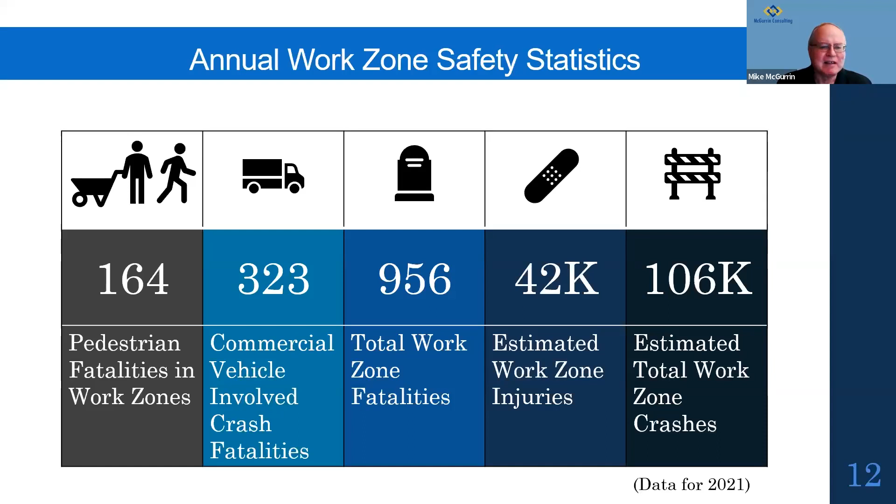So one of the issues: if you don't have smart work zone devices, you have planning data where agencies have planned out where work zones will be occurring, but that's often fairly coarse data. It may describe a large project, so it'll say, okay, over the next X number of weeks, we're going to be working over these miles of roadway. But in reality, of course, at any given time, only a portion of that roadway is actually being worked on. So you don't have that granularity from the broad planning data.

And similarly, you have static message signs, work zone ahead, that we've all seen, and those are very useful. But I'm sure we've also come across where there's a work zone ahead sign and we drive by and there's no closed lanes, there's no workers present, there's no work going on at that given time. So it's not always up to date. There's certainly a work zone going on there, but it may not be going on the day and time that you drive by and see the work zone ahead message.

So the idea is with smart work zone devices, we can have real-time sensors, communications with data coming from those sensors, and link that up with computer technology to get that real-time information. And that can be used both to inform traffic management operations, as well as to inform drivers and travelers of real-time work zone conditions. Next slide.

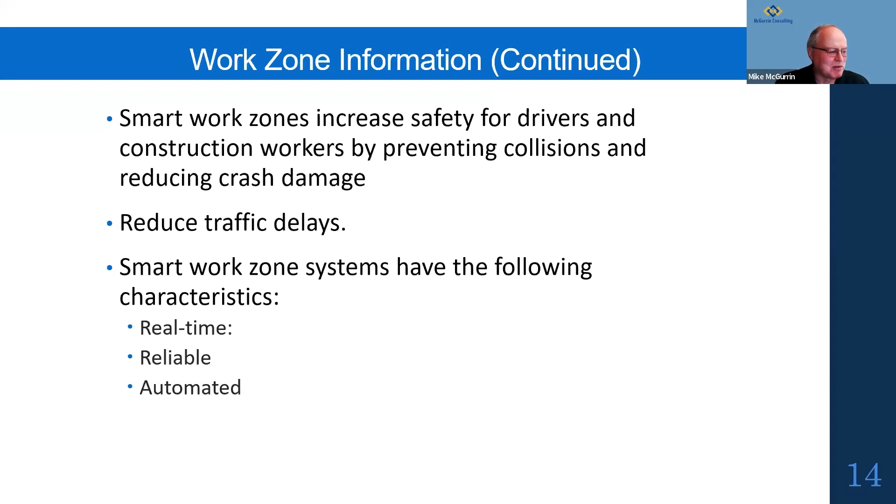So today's webinar, I should point out, is going to talk about smart work zone devices feeding data back to traffic management operations or out to third parties who then provide it to traveler information systems. It's not going to focus on direct communications from, say, a smart device on the roadside just down the road a ways to a portable dynamic message sign. Those are also very important, but the overall scope of this project was on managing data, not the local data. So there's another whole aspect of smart roadside devices that the report doesn't really address.

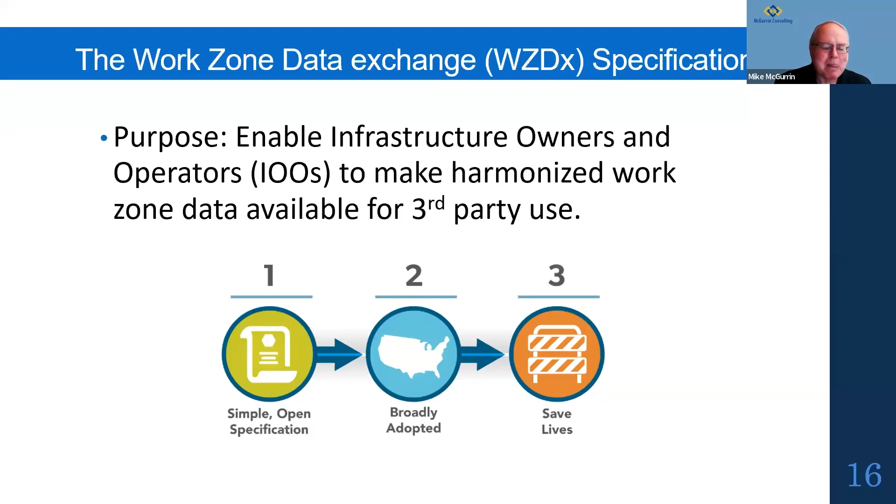So the data flow, how does this work with the work zone data exchange specification? The first is you need to get the data back from the smart work zone devices using a common specification. And that was actually the second step historically in the development. The first step was, if you look just down below that, published in a common format. The first part of the work zone data specification we developed was that common publication format, so that state agencies could provide this data out to third parties, and then that could get delivered into devices, or screens and displays that are directly in front of roadway users.

But then it was seen that they needed to also have a common specification for how these smart devices talk back to traffic management operations. And that was also now included in the work zone data exchange specification. A lot of the original work was based on work done by Massachusetts DOT, and Jacob later today is going to talk about what MassDOT has been doing in their systems. And a lot of their preliminary work then became the basis for that part of the work zone data exchange specification. Next slide.

So the current status of that specification: the US DOT keeps a feed registry to have links to all the different agencies that are currently providing feeds. They have 25 different agencies currently on their feed registry, providing work zone data exchange conformant data feeds. The current version of the specification is version 4.2, which came out early this year. And again, I think Ross is going to talk more about what's been going on since then and the future plans. But that version was the last version created by what was called the Work Zone Data Working Group, directly under US DOT sponsorship, with input, of course, from private industry, state DOTs, et cetera.

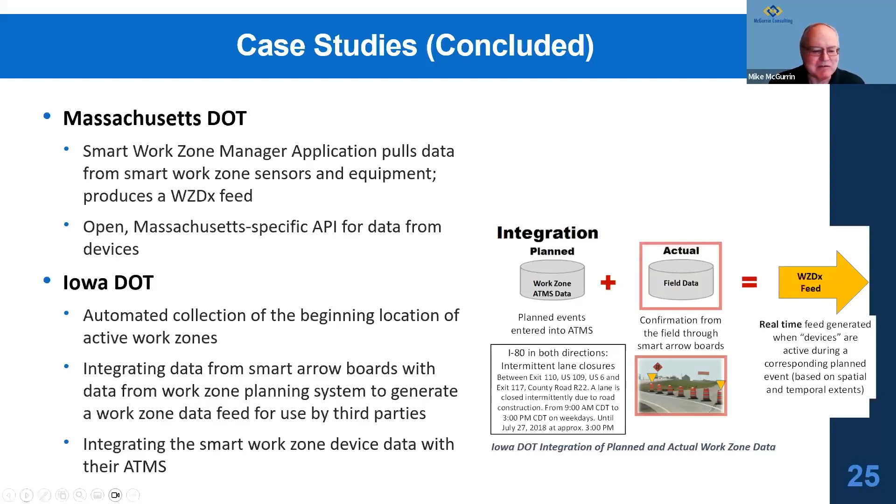So then it goes into the cross-cutting summary of analysis. 4 of the 5 systems do have work zone data feeds. The 5th one is planning to implement one. So that was common across all 5. All 5 use smart arrow boards. 4 continue to use them. The other one wants to pick up using them again, but they had funding issues. They were using them in a pilot project. The pilot project was successful, but they didn't have the money to continue to use them at the current time. And then there was a mix and match of other technologies that was used among the different agencies.

As I mentioned, there was sort of a compare and contrast. Iowa started small, was successful, it grew and grew and grew. Southern Nevada sort of tried to take a huge bite of the apple all at once by developing a very comprehensive approach, laying out a lot of requirements on their member agencies and on the vendors providing equipment. And the agencies really haven't bought into that. They have not really gotten a lot of buy-in with trying to take that large chunk approach.

As I mentioned, Minnesota used arrow boards and wants to get back to them. Funding's been a challenge. One of the issues is who benefits and who pays. The benefits are mainly seen by traffic management operations and safety operations, but the cost for deployment of the devices is on the construction and maintenance offices. So there's been sort of a mismatch, and funding has sometimes been an issue that's reported. Next slide.

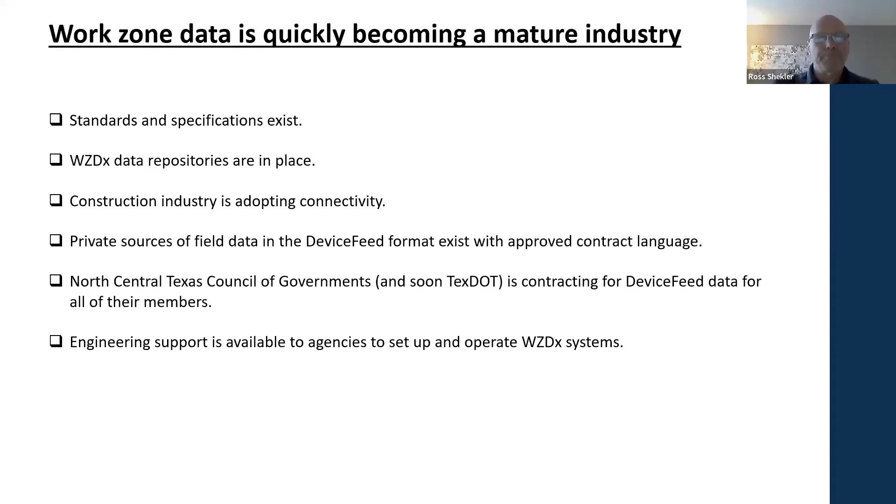So on the standards development effort, this is an AASHTO, ITE, NEMA led effort with a whole bunch of public and private members sitting on the committee. I have the honor of co-chairing that with Raj from Florida DOT. And we're well along in the process.

We are at the point where we've had user comments of a proposed draft standard. The user comments have gone through the committee and the friends of the committee, and they've come back and been reviewed. We just voted to accept those right before Thanksgiving. That's being put ready to go out as a truly public user comment period that will be coming in the next couple of weeks.

With those back and reviewed and incorporated, it will then go on to a test phase. The committee is looking for sites where we can test the standard, make sure that what's being done in the field and the standard align properly. And then, realistically, by third quarter of 2024, we should have a fully published standard.

And then we will go into a maintenance process for the years going into the future. There's already a list of more things that we want to add to the standard. There's more things happening. There's more people, more activities coming in. Next slide, please.

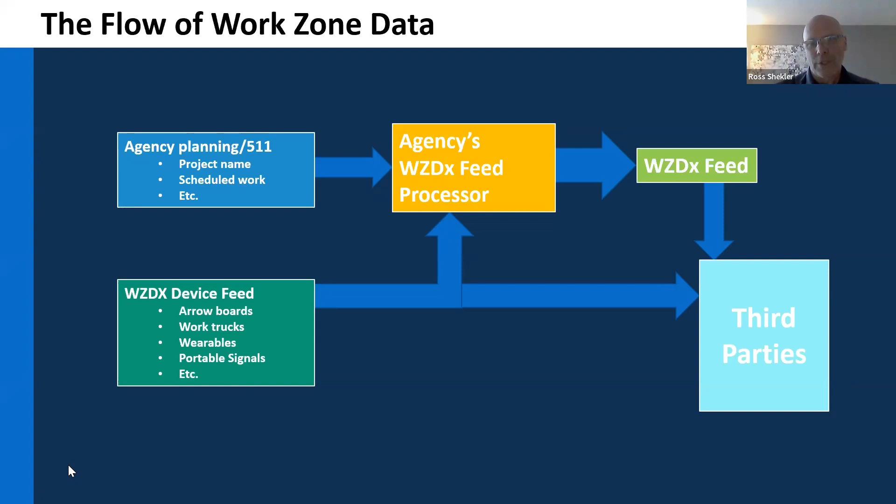So with that said, I've taken 4 slides and made them last 20 minutes. I apologize for that. I'd like to hand this off to Skylar. The work that Iowa State University and the CTRE group have done has been fantastic, and he's got a good story to tell.

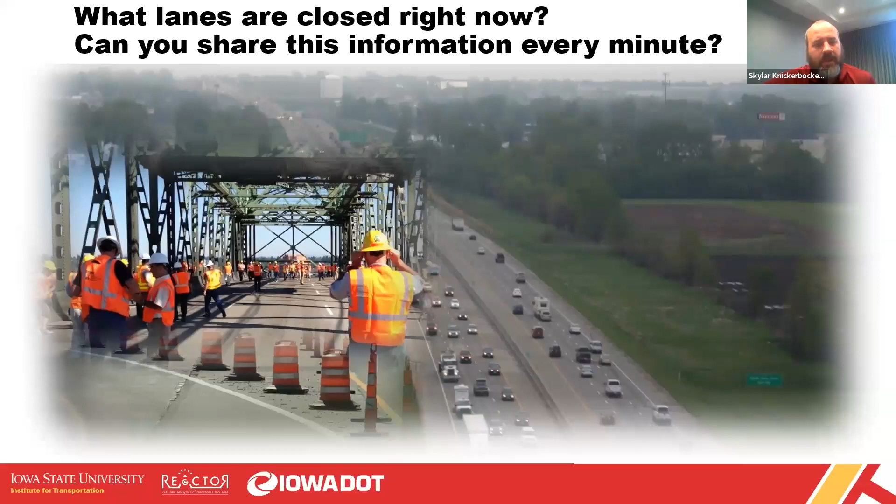Reiterating what Ross and Mike said, there are inaccuracies in the data. I often go to various state DOTs when I'm out traveling and presenting, and it's pretty easy if you can see both cameras and the work zones they put out there to spot inaccuracies. Here in Iowa is a screenshot I found within a couple minutes, where we said we'd reduce it to one lane and the project was going to start at 9 p.m., but we're almost an hour later and there's no lane closure in sight. So how do we not lose the confidence of who we're providing this data to, so they know whether that work zone is actually out there because we verified it, or it's just estimated because we're planning on working out there but don't know if it's actually out there at this time.

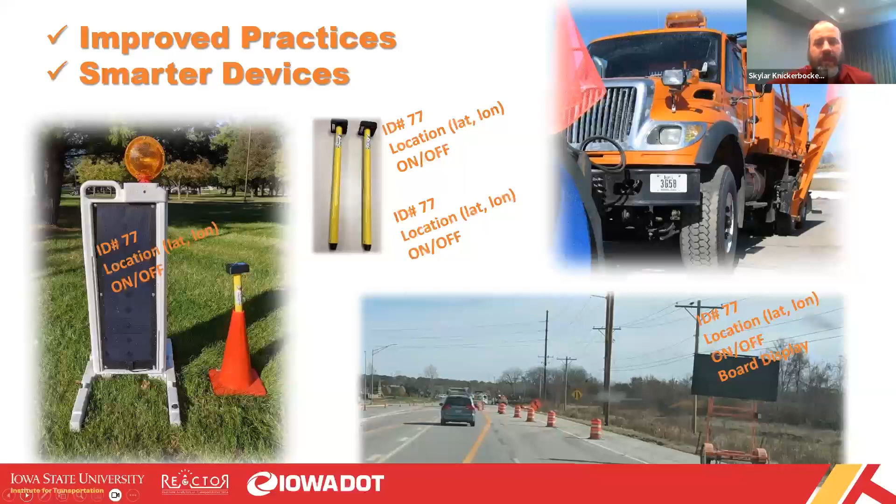And this is just a sampling of the devices—I'll talk about a few other ones we're testing out at the end. But next slide, where we really focused was on the smart arrow board deployment.

Mike said that we started small, and really the reason we started small was we knew this was going to require commitment from our contractors, requiring them to procure resources and buy these devices and build up their inventory and fleet. So that's where we started, just on the interstates, to test things out, then further expand to all projects in 2022.

The other reason we started with the arrow boards is that it really doesn't require any training or changes in the field. The people in the field are still just flipping the switch to whatever the pattern is, and then we start getting that data on the back end to the DOT. The other nice thing was that we could modify our existing inventory, so it wasn't requiring all the contractors to go out and buy brand new arrow boards—they could still use the arrow boards they have and just add a component that makes it smart, able to communicate with us.

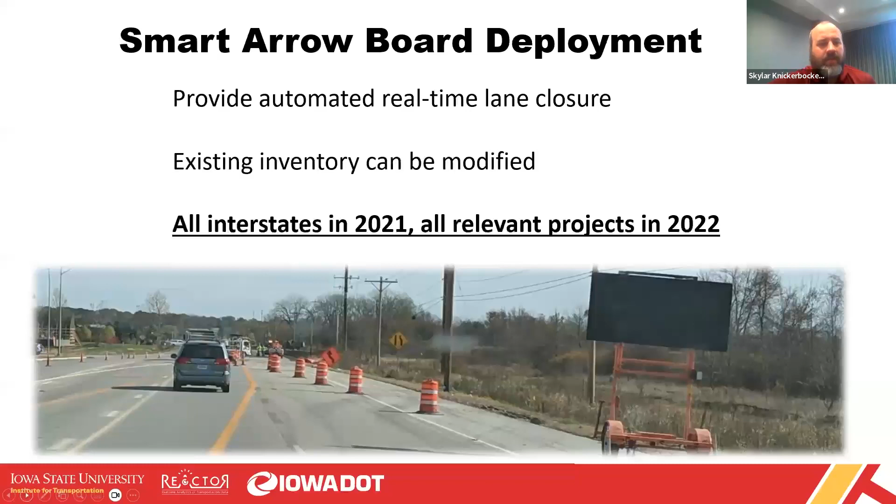I like to throw this one in there. Really the only difference between a non-smart arrow board and a smart arrow board—if you click the slide, it will show up communication—is that it's communicating from those devices to the DOT, so we know where those devices are located and what the pattern is on there, so we can have confidence about where the work zone's at. If you go to the next slide.

Unfortunately, we started this effort before there was the Work Zone Data Exchange device feed, so we could only have dreamt of having a WZDx device feed at that time. So what we did was develop our own homegrown smart arrow board protocol, as we called it, and that's what we gave to the vendors to say, here's the data format we want. It's nearly identical for the most part to the WZDx device feed, but it was really starting to lay that groundwork, along the lines of what MassDOT was doing, to generate that device feed and get that arrow board data in a standard format, regardless of what manufacturer was providing the arrow board.

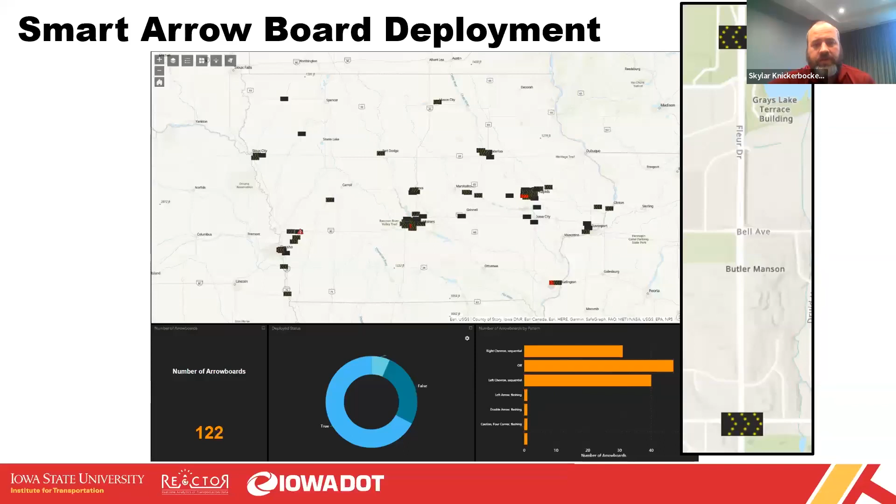We've ranged from typically 90 to 140 arrow boards at any given time across the state, with the definite peaking in the summer months, where we have those active arrow boards across the state.

Now that covers all of our devices, and I'm going to transition to the actual work zone information, because ultimately it's great to get this data and have confidence that we know where the work zones are, and it's used throughout the DOT. But really our goal is to get the information to the driver so we can alert them ahead of time that there's a work zone ahead, and give confidence to third parties as well that we know there's a verified work zone.

How we've accomplished this is through our work zone data exchange. We received a demonstration grant in Iowa to create a WZDx, and the two main points we did through the demonstration grant were: first, we created WZDx based on our existing work zones in our ATMS, providing the latest data entered by our operators. Second, we integrated these smart arrow boards, taking the planned work zones our operators are already submitting and marrying up the smart arrow boards associated to those work zones, to produce a WZDx feed that has verified information of where those work zones start.

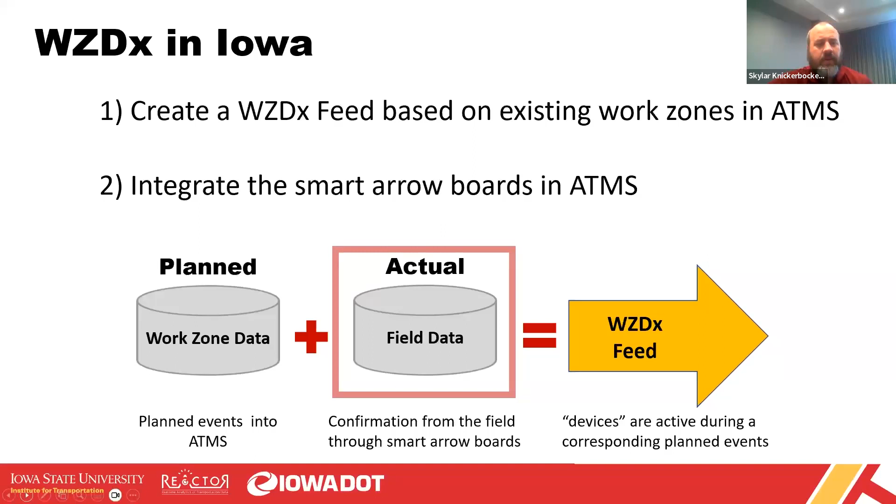This summarizes the benefits we see of having the WZDx plus the smart arrow boards. Whenever an arrow board is associated with a work zone, we show that the location is verified in the WZDx feed. So a third-party consumer taking this data knows we have high confidence that there's a GPS equipped device out there collecting and providing that information used to update it.

The system is also set up so that if that arrow board leaves the work zone or goes outside the extents of the work zone, it gets disassociated with the work zone, and that work zone goes back to its estimated status, or whatever it would have been if there wasn't an arrow board located there. So we still have the ability to show that estimated information, but supplement it with the arrow board information.

Ultimately, our goal is to improve safety and mobility through our work zones by being able to communicate to drivers most effectively what's out there on our roadways.

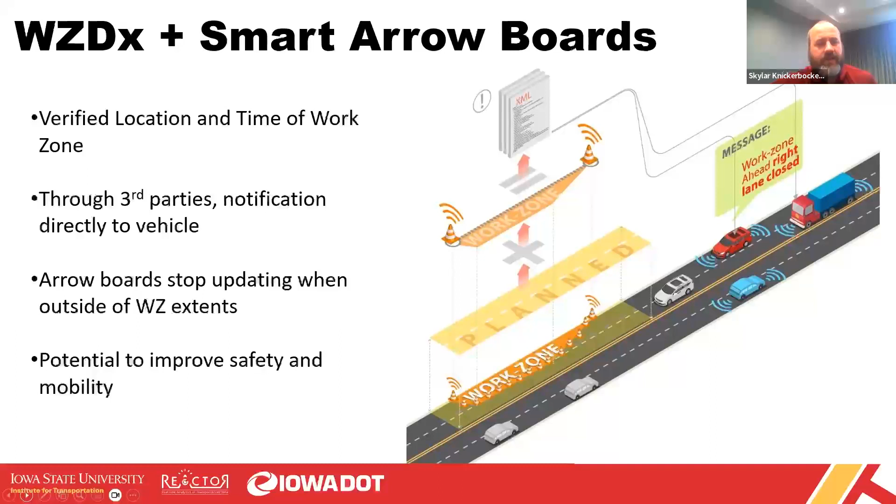This is just a peek behind what the operators see within our system. We do not have it automated at this point; we just have a manual system where operators enter the arrow boards just like they normally do. But now, in that little red dash box, you can see a smart arrow board option, so it's one extra box they can check to select an arrow board.

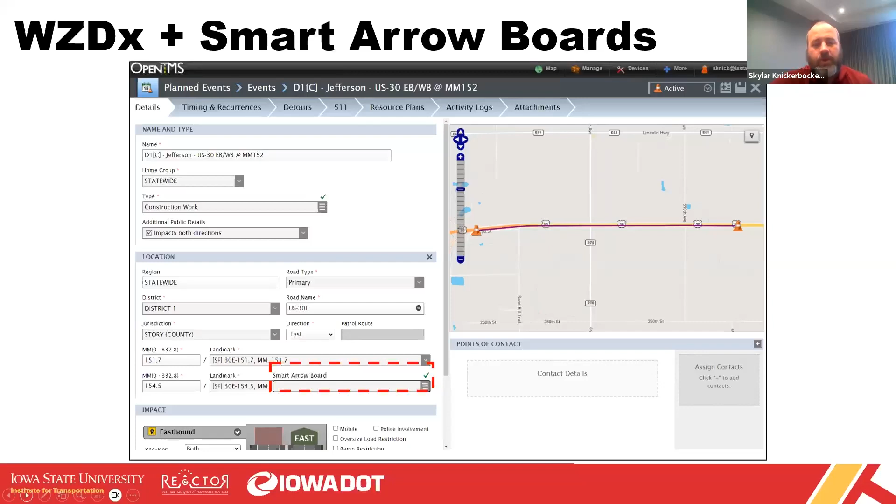Once they assign an arrow board to that work zone, it'll continue to update that work zone with its location. And if it's a recurring work zone where they work tonight from 8 p.m. to 5 a.m., it'll continue to follow it as they move that arrow board on and off the job, and show it as verified whenever it's actually out there on the roadway.

This is public facing, so we had to remove some of the technical aspects of it and just be able to give them the basic information of what it is. But it's just another way for us to communicate out the work zone information to a different audience beyond just the WZDx, but using the same system on the back end. Next slide.

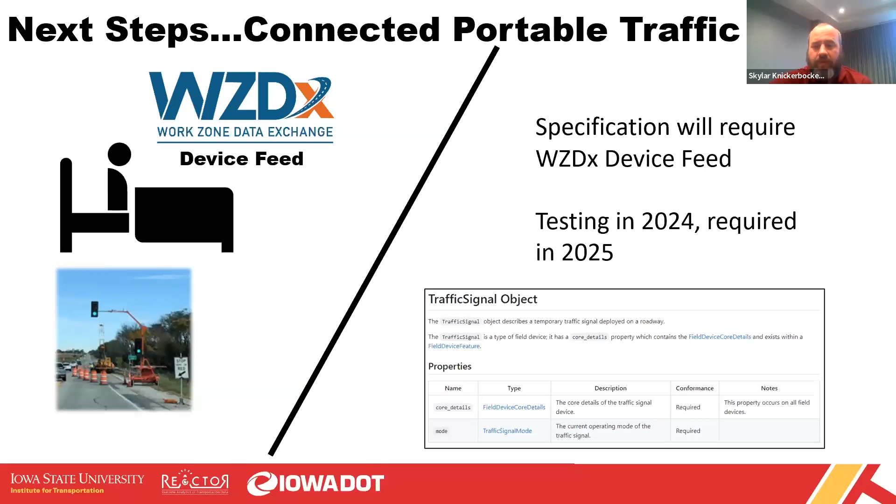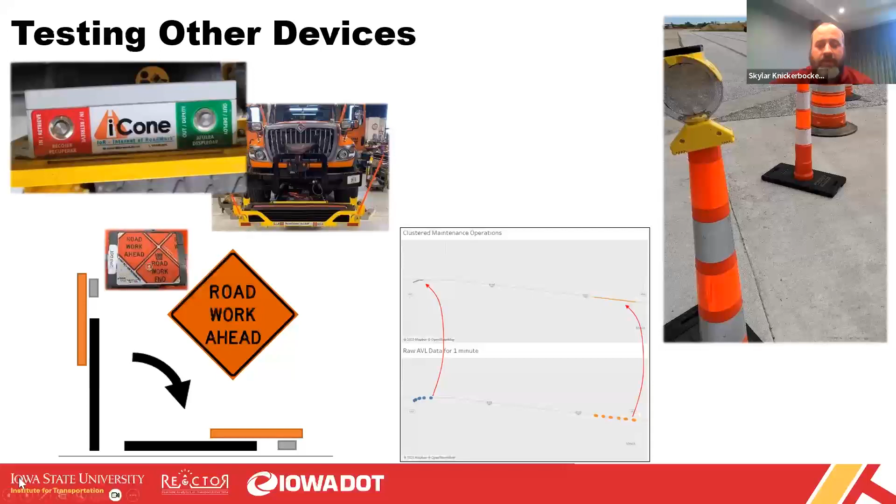And then also just using our AVL equipment where we know where those devices or where those trucks are located. If they meet a certain criteria, we can safely assume that they're in a maintenance operation that we can then provide out through our WZDx device feed.